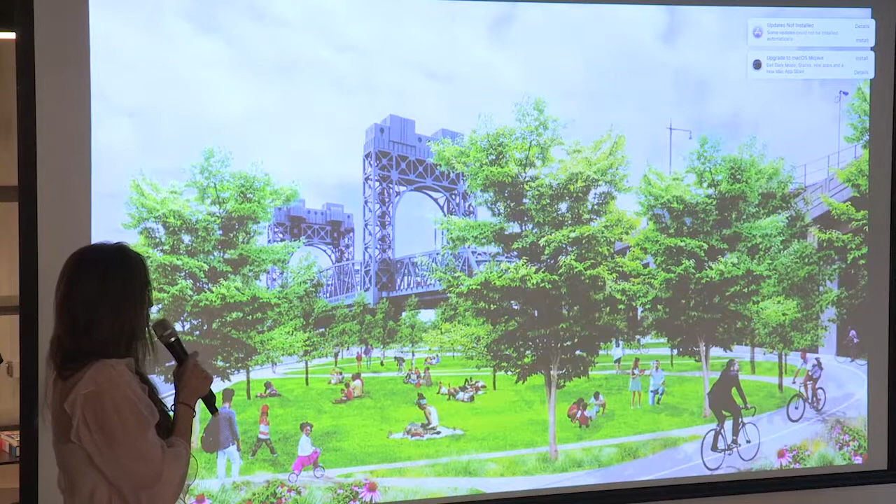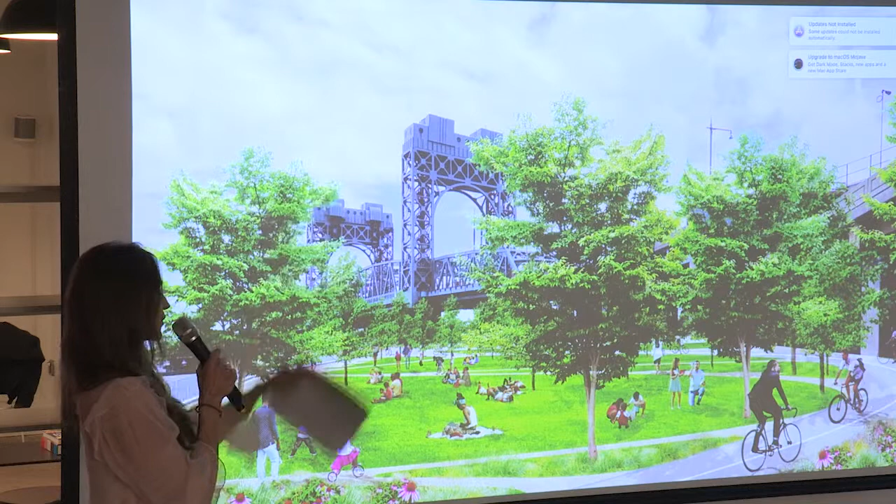We are building a continuous bike path and pedestrian path around Manhattan's waterfront. There's already a contiguous path on the west side and down on the tip of Manhattan, and up on the east side. We're focused on the north part, north of United Nations now, to link the area around 53rd Street.

We are bringing online a tech innovation hub in Union Square, on 14th Street. It'll be opening in a couple of years and will start construction soon. The idea is to provide a space for tech companies looking for a place to grow, and co-locate them with new innovative tech training providers that are training New Yorkers for the skills of the future, providing an alternative form of education that doesn't require a four-year degree. Again, this goes back to creating jobs for New Yorkers and pathways to those jobs for the people we serve.

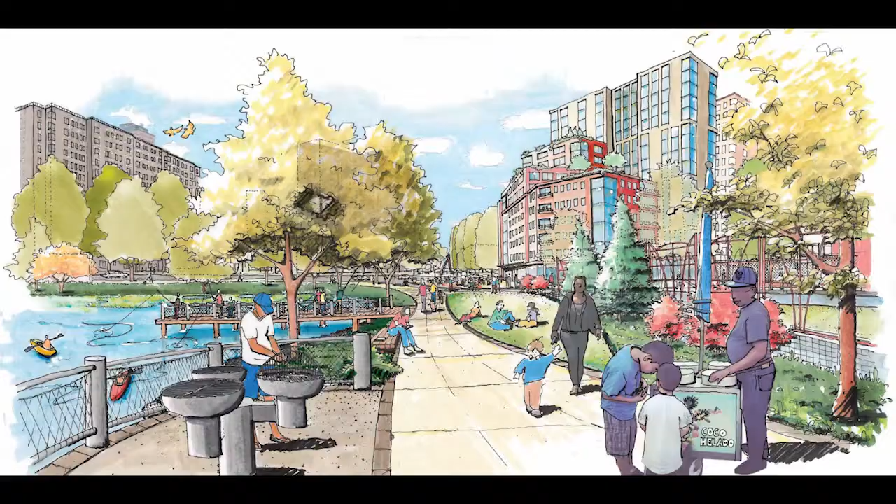We're rezoning a number of neighborhoods across the city, from the Rockaways to Inwood and other places in New York City that you might not know existed if you're not from here.

And we're making investments in strategic areas of New York City's economy. This is a rendering of our mini Made in New York campus in Sunset Park, Brooklyn, which is going to host fashion, film, and TV industry tenants, making sure our traditional industries have a place in the 21st century economy of the future.

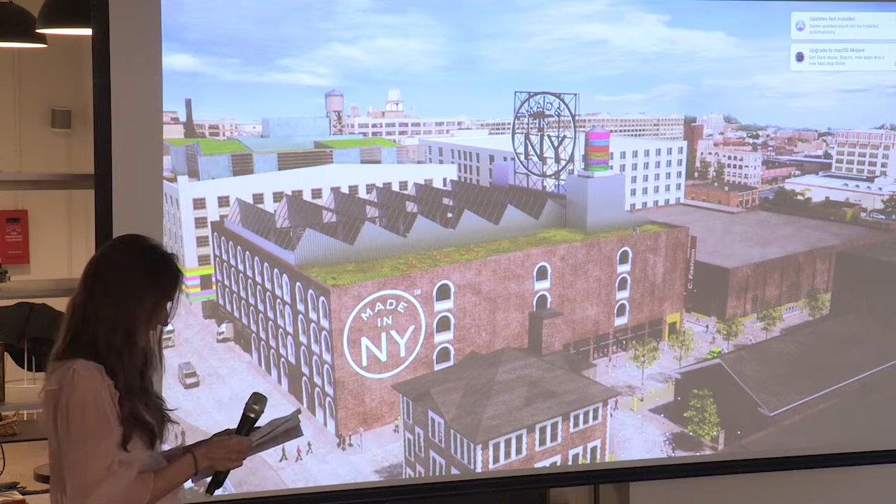As the Chief Strategy Officer, I get to think about where the middle-class jobs of the future are going to come from, and really how do we build a more inclusive economy that is not leaving people behind. Technology has a huge part to play in that, because when you look at the roles and jobs that are growing and paying good wages here for a range of educational attainment levels, tech plays a key part.

I thought I'd talk today about smart cities, what the city is doing to lay the groundwork for the city of the future, our investments in smart cities, and how those investments are really driving demand for cybersecurity services and products that are the underlying rationale for our $100 million investment that we're partnering with SOSA and others on.

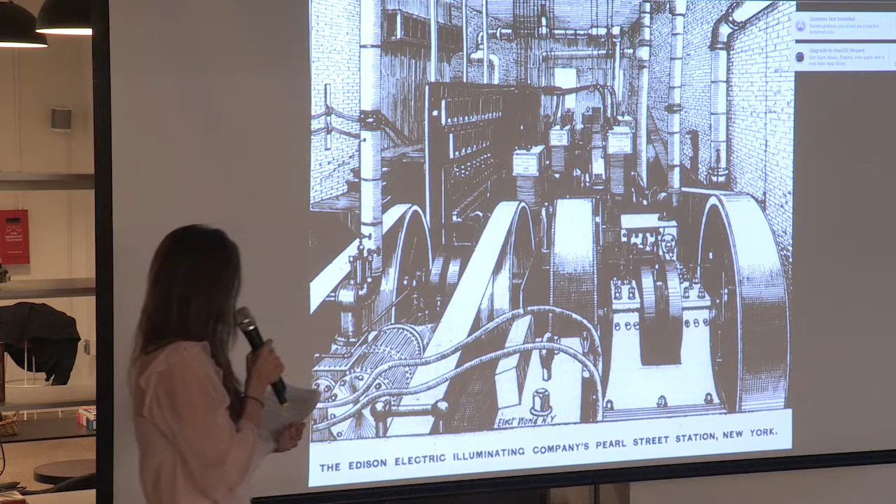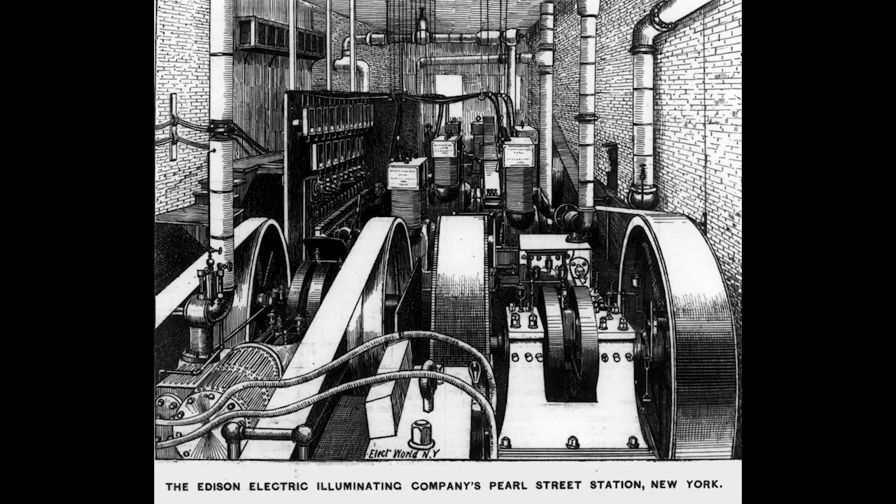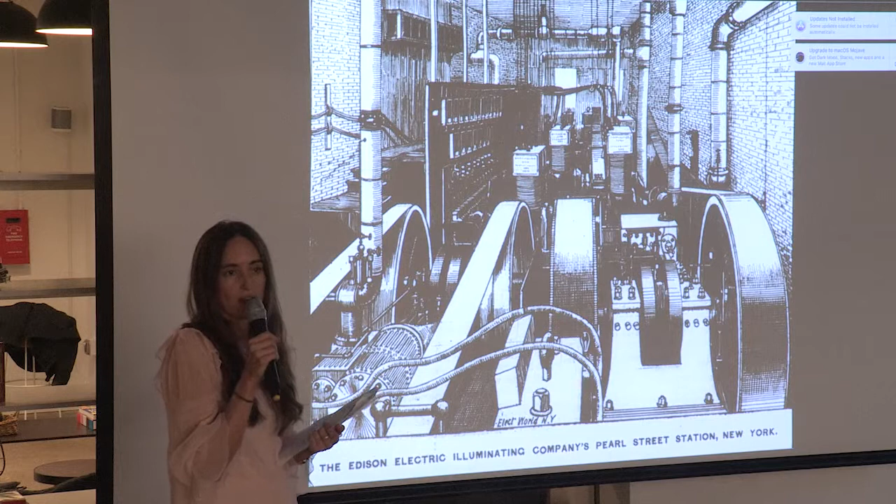New York City has long been a lab of innovation and of solutions that then get scaled globally. Here's a picture of Thomas Edison's first ever commercial power plant in New York City on Pearl Street in the financial district. It was the first commercial power plant in the world, and also the first cogeneration plant in the world, providing electricity to the grid but also steam to manufacturers in lower Manhattan.

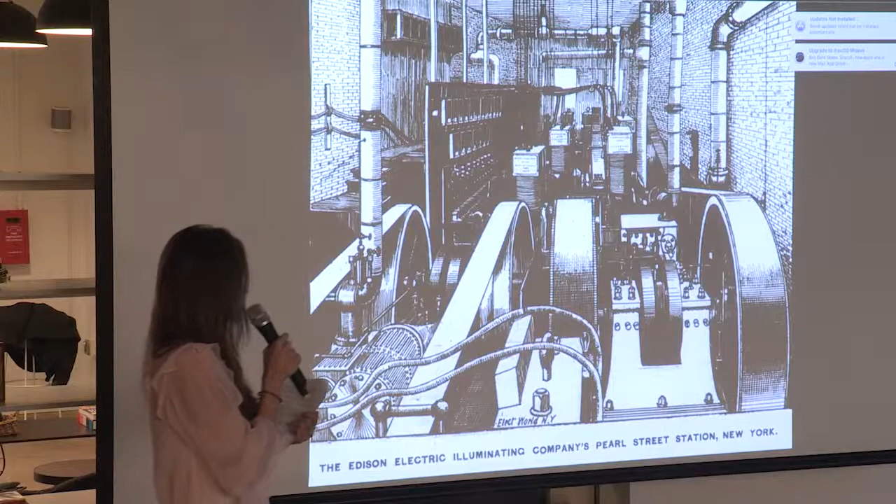Since then, New York City has really built a legacy of reimagining cities and what cities can be, and catches a global limelight. So when something happens in New York, people are watching and replicating it in other parts of the world, like what's happening with our High Line or Universal Pre-K, which is now an initiative being replicated across the United States. And when it comes to cities, I think there are really three fundamental reasons why New York City is very good at putting forth innovative solutions.

The first is the density of the infrastructure, and here it's just a matter of sheer scale. There's very few cities in the world that can compare - London, Tokyo, Shanghai, maybe a couple of others, but it's really a handful. When you talk about scale, we have nearly 800 bridges and tunnels in New York City, over 1 million buildings, and we spend $15 billion in energy annually. The stats are remarkable.

The second reason is that we have a very deep talent pool. Not only do we have a very large-scale educated workforce, with 2.3 million people with bachelor's degrees - which is more, by the way, than Boston, Philadelphia, Washington D.C., Los Angeles, and San Francisco combined - but when it comes to cities in particular, we are a global center of real estate, architecture, and design.

The third reason why we're good at solving problems is because we have a lot of them. There are lots of challenges with New York City's infrastructure - our infrastructure is stressed and old, and we haven't updated some critical infrastructure for over 50 years. The vulnerabilities of an aging infrastructure, and being a coastal city on the water, can create challenges that are forcing government to work in partnership with the private sector and with our academic institutions to really push forth some solutions.

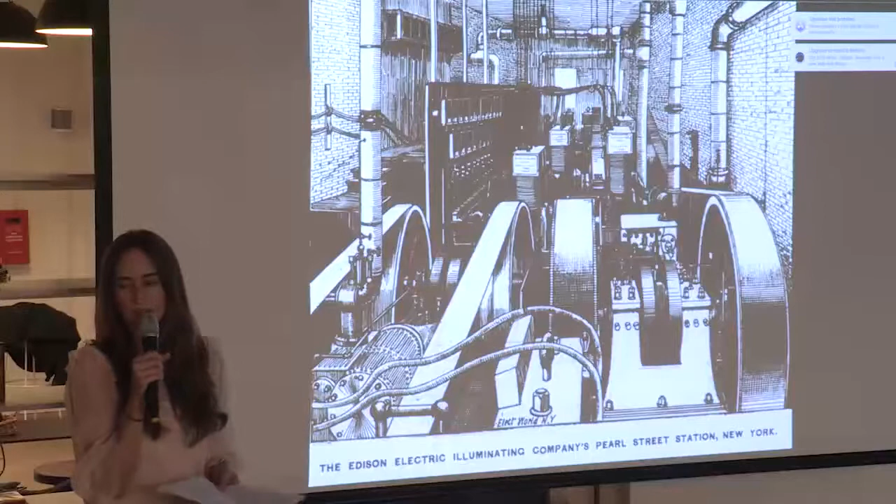I wanted to give a few examples in three areas that are a priority, where New York City is taking the lead. The first is transit, and if you've been to New York for even a day, you know that our subways are really old and strained. So the city is thinking a lot about how we can invest in complementary solutions that support our transit system, because we're expecting another half a million people in the next two decades. The city continues to grow.

An example of that is the ferry that I talked about before. We launched it in 2017, and it's already carried 5 million passengers. While this is thought of as a traditional mode of transportation, the design of these ferries is cutting edge, particularly in how they're able to cut through the water and generate low wake, which makes the ride smoother but also is more lenient on the infrastructure on the water, like the bulkheads. It's also equipped with free Wi-Fi and charging stations on the boat.

Together with NYC Ferry, which is connecting the 5 boroughs and activating the waterways on the waterfront where more and more people are living and working every day, we're investing and piloting other transportation solutions that we hope we can learn from and bring to scale.

One of those is dockless e-bikes, partnering with companies like Pace, Lime and Jump to pilot this solution and serve areas of the city that aren't well served by mass transit, like the Bronx, Staten Island, and Far Rockaway in Queens.

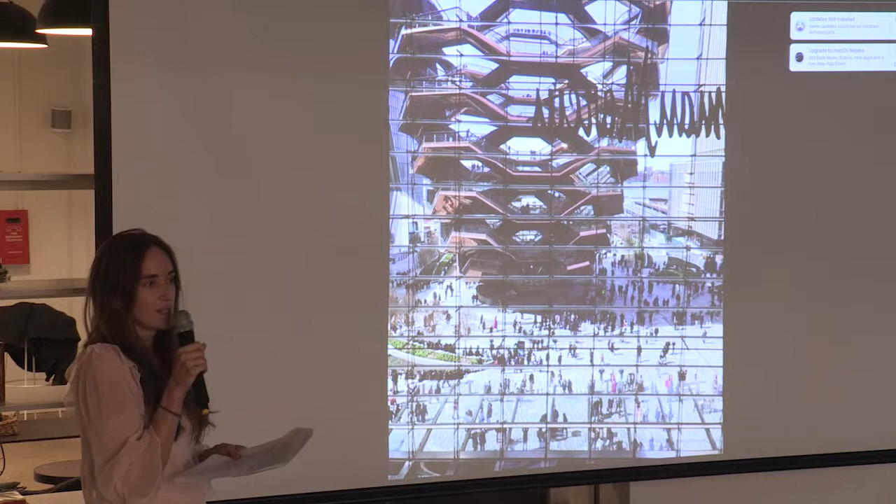I'd be remiss if I didn't mention, I don't know if everybody's been since it opened, Hudson Yards — how many people have been at Hudson Yards? I think this is another great example of New York City's ability to take on really big challenges. It's not just about existing neighborhoods and existing infrastructure, but about how the city takes on projects like this.

This is the biggest private real estate development in the history of the United States, building on top of platforms over a rail yard. It has innovative technology integrated throughout: microgrid, stormwater recapture, lighting and occupancy sensors, and so on. New York City is a unique place for this, and these projects provide a runway to think about how technology can benefit residents and New Yorkers.

We're in the very early phases of a similar project, although much larger scale—I'd say 6 times the size of Hudson Yards—in Western Queens, also building over a 180-acre rail yard. We're in the beginning planning phases, thinking about what that new neighborhood could look like and how we integrate technology responsibly.

One thing I found personally interesting about Hudson Yards is that while it integrates smart city technology, it is not the smart city that was once talked about or initially envisioned. I remember hearing about it as a true smart city, with constant data collection of traffic, flows, heat, noise, and air pollution, and a constant feedback loop that informs operations and planning. That hasn't happened, and I think it speaks to the challenges of deploying urban tech solutions in the city.